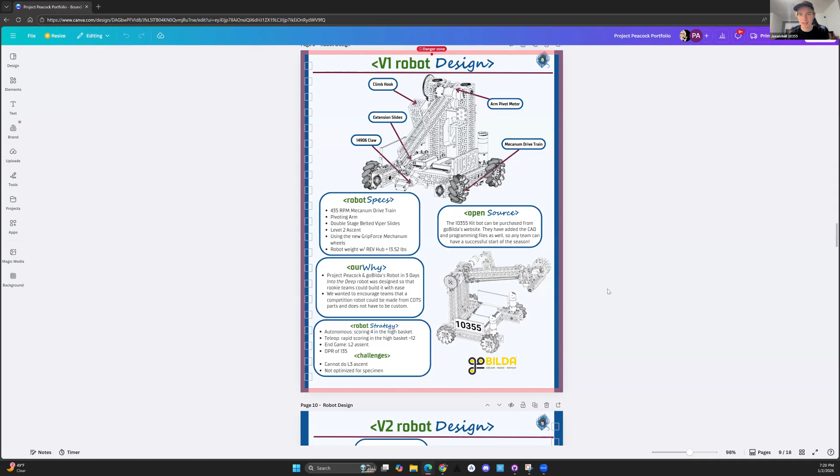One of the things the judges also like to see as part of the awards is what lessons you've learned and how you've thought about improving, and then how you decide to implement that. We can see that as we go into the V2 design, that we took a lot of what we learned and made it to where we didn't have to worry about that, and made it better.

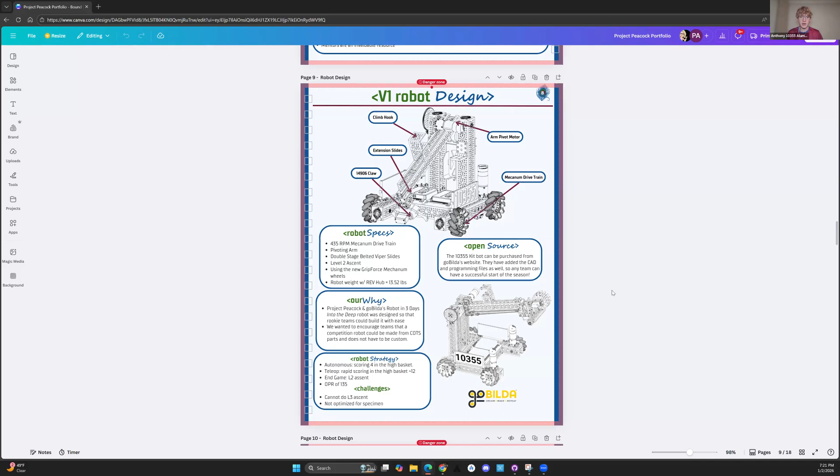So here's our overview page for V2. We really tried to highlight all the improvements from V1, things we learned from the past robot that we applied to this one. For example, we added level 2 hang and increased the specimen ability.

Just highlighting the important things, but keeping it nice and concise. Here, all we did was put bullet points — you don't have to do much detail. Just highlight the most important things that go along with your game strategy, and then you're fine.

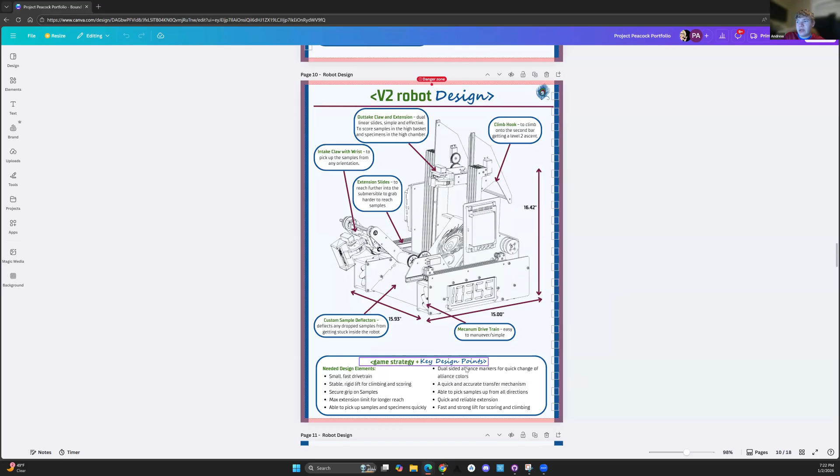Your game strategy and key design points — we made our robot based off of our strategy, and that strategy drives our design process to manufacture and create a robot that fits that strategy, right?

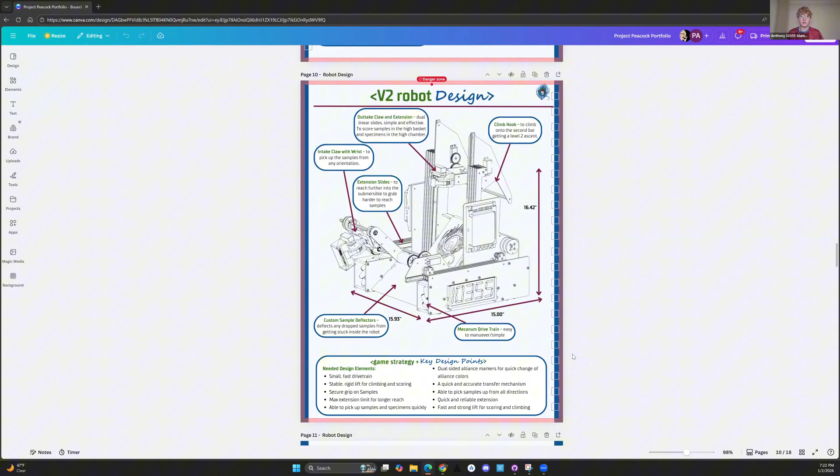One of the things also is you don't want to explain everything in the portfolio, because then the judges have no room to ask questions. This gives them enough detail to know what you're talking about, but still gives you as many opportunities to be asked questions as possible.

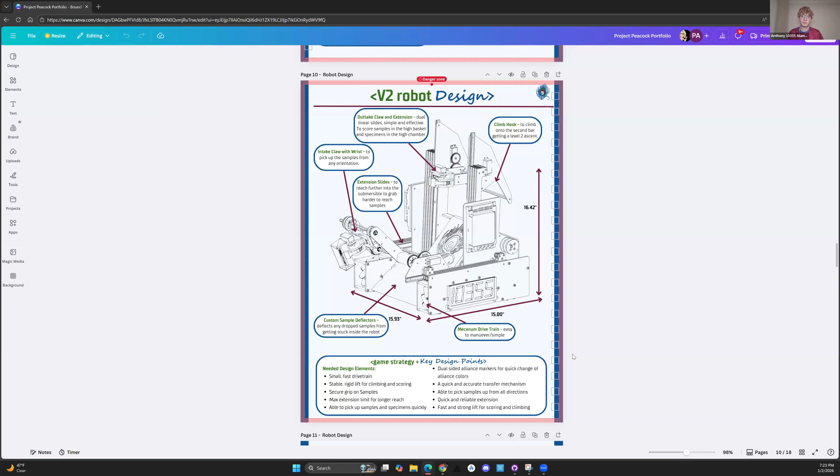So for our chassis design, we used the iLight drivetrain simulator to simulate our drivetrain performance, which is big for Think — math is big for that. So we make sure to include all of our motor calculations, then explain the drivetrain mechanism, pinpoint, all that stuff.

Includes lessons learned from the previous robot. We pretty much have a lessons learned section on every page, except for the first few pages, but it's on most of our technical pages. We always show that we think all of our designs can be improved, and they're not always perfect, so we can always be improving them.

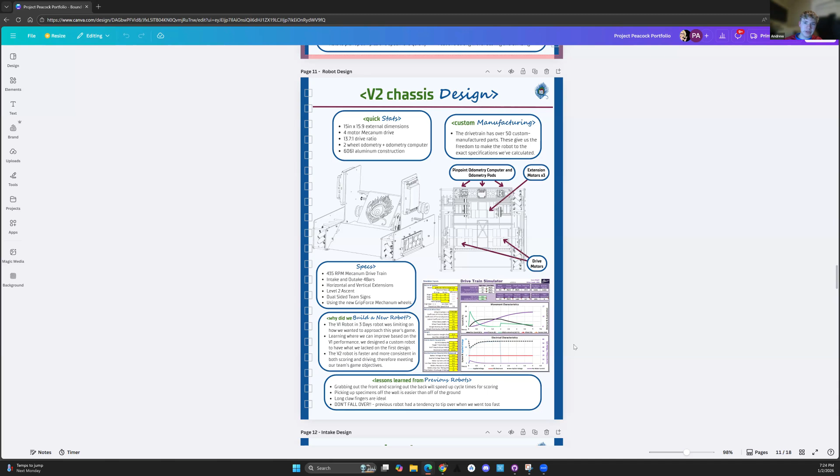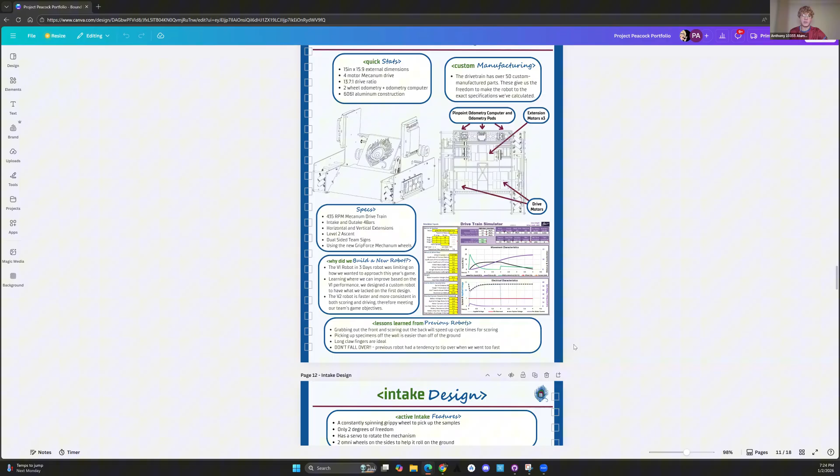Showing what we can do better, the judges like. Being able to show that we reflected on the performances we had and improved from there is something you guys can take into this season as well. It really shows them that you didn't just build a robot and were done — that you went back and learned from what needed to be improved.

We can see that with the active to the passive design and why we did that. Being able to show that we do all this thoughtfully and have reasons behind it, we reflect on the pros and cons, and do the best from there.

So here for our intake page, we included the V1 intake and compared it with the V2. Something really important is to explain why you did things.

For example, here we went from active to a passive claw intake, and we explained that it would be easier to select individual samples out of the submersible. So just explain your design choices as much as you can.

And then as you can see, lessons learned again at the bottom of the page — that's always important to us in our thought process of things.

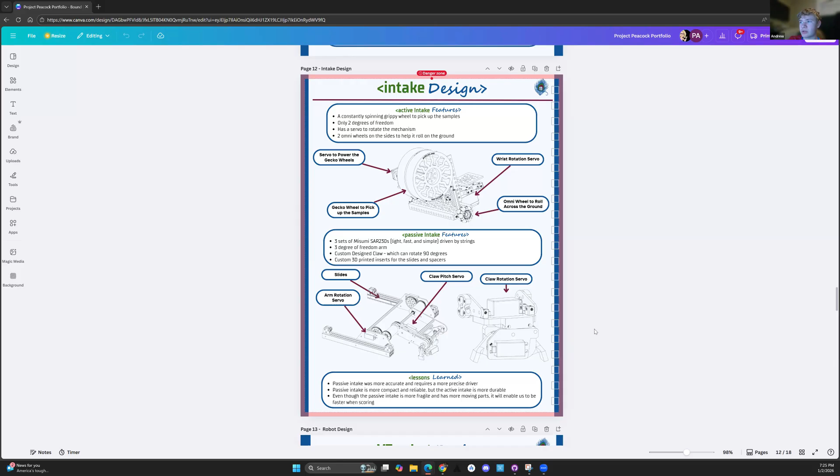All right, so then here for V3, the main thing is just adding the level 3. And then we also switched to carbon fiber to reduce weight for the level 3. And then we just go through and explain the changes, why we made them, pretty much the same as the last couple.

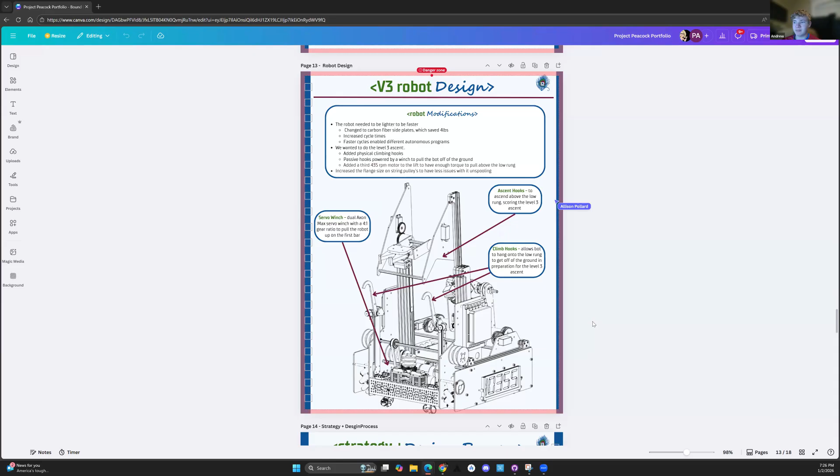But yeah, just again, showing them every step that we take and why we do it and what it includes really helps to emphasize what we do and why we do it. And so we can kind of see that with this page.

We wanted to score high in auto for both samples and specimen, and we had to make mechanisms to do both. We figured out it would be easier if the mechanisms were the same so we weren't having to worry about multiple different mechanisms.

So we did a passive transfer so we can grab and score on different sides and have faster cycle times. One of the things we had to play with and figure out was how we actually grabbed the sample from the robot, because sometimes getting the grabbing perfect wasn't the easiest.

And then obviously we went into our total points and our ideal match if we were doing a solo, so we could figure out how to do that. And then obviously the math for the thing with the lift pulleys, we had a lot of issues getting the level 3, but being able to figure that out and make that work was something we were really proud of.

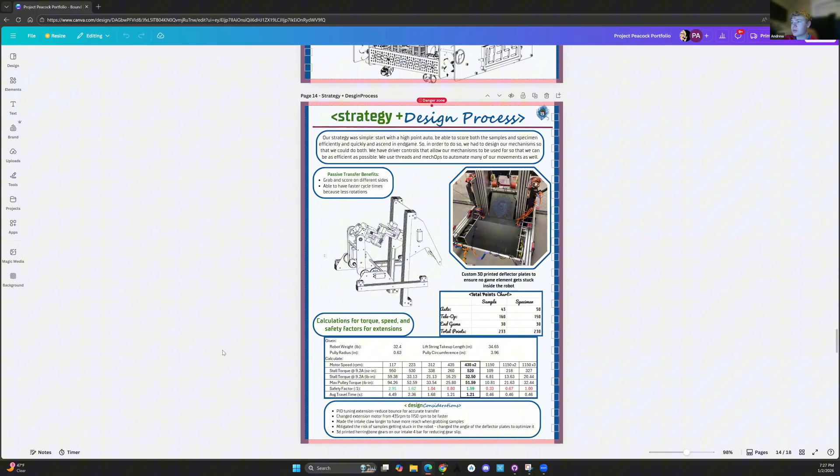Andrew and Jackson, do you guys have any thoughts or comments on it? No, you hit everything. So going into auto, yeah, we use Roadrunner and the pinpoint.

We talk a lot about this. This is probably one of our wordier pages, but we explain why we do Roadrunner, why we didn't do Pedro Pathing that year, how we use the four bar odometry pods and the pinpoint, and how we were fortunate enough to be able to test those.

We then go into our autonomous routine at the bottom and on the right side about our pathing, and we have the arrow matching the color in the box, so you can see, on the specimen, the green arrows are for splining and sweeping the samples into the human player station back and forth. So it really allows for the color code so judges can see that.

And obviously, again, we have lessons learned at the bottom, and there's a lot of different things we learned about how to make these autonomous programs and how to go from there.

So Andrew, Jackson, you hit everything. One thing, like color coding it to match the different pathing is also another neat idea, just to help the judges.

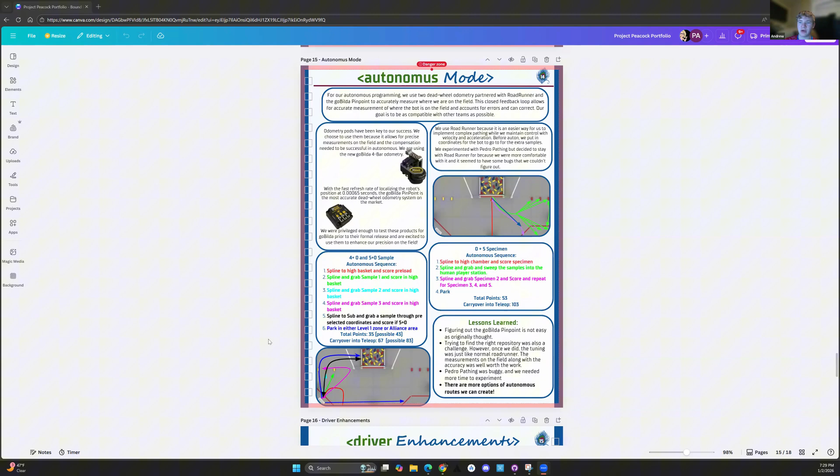Because some of the judges don't know the game very much, and so being able to somewhat dumb it down a little bit, make it easy for them to understand, and make it clear, is also very helpful.

And also bolding things makes it stand out to people. It's like, hey, this is important. Those kinds of things always help show something.

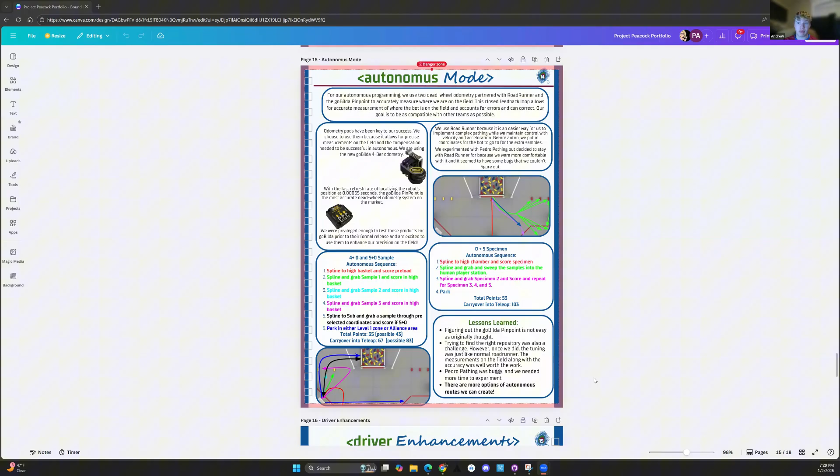Yeah, and then our last page is our driver enhancements. We took what we've learned over the years: less buttons, better. And if we can automate mechanisms, let's do it to help it be more successful.

So we had a lot of toggle controls. Things like opening the claw were the same button, deploying the intake was the same button. So really trying to help optimize speed and automating mechanisms.

So for example, after we would grab a sample, the entire time for when the intake would be brought in to actually transfer the sample was all automated. All the driver had to do was push a singular button. That was really beneficial because it doesn't have that many buttons.

But it was really easy because the drivers would know if they were running specimen or sample in the match, and so they could be in sync because they would know, okay, I'm touching the specimen, and I grabbed it, driver two needs to lift up. I touch the submersible, driver two needs to go down.

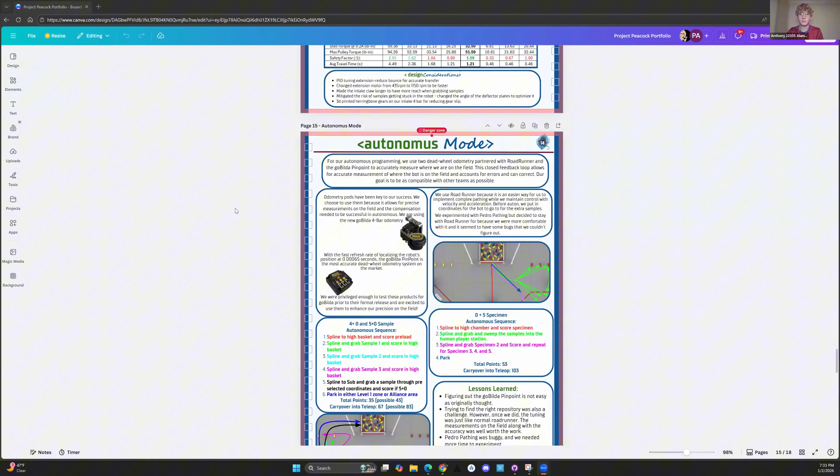Okay, if there are no questions, I guess we can continue with Turbo V8.

All right, can you see the slideshow? Yes. All right, Ethan, you want to go ahead? Oh yeah, so

We're presenting Pure Pursuit and Inverse Kinematics.

Okay, so Turbo V8 is a community team based in Pleasanton, California. Our team started in 2018. We have a team of 80 high school students.

So today we're presenting Pure Pursuit, Inverse Kinematics, and both of these algorithms. The problem is we want to move autonomously in a curved path, so we can use max power the entire duration, and then it autocorrects if we deviate from the actual path.

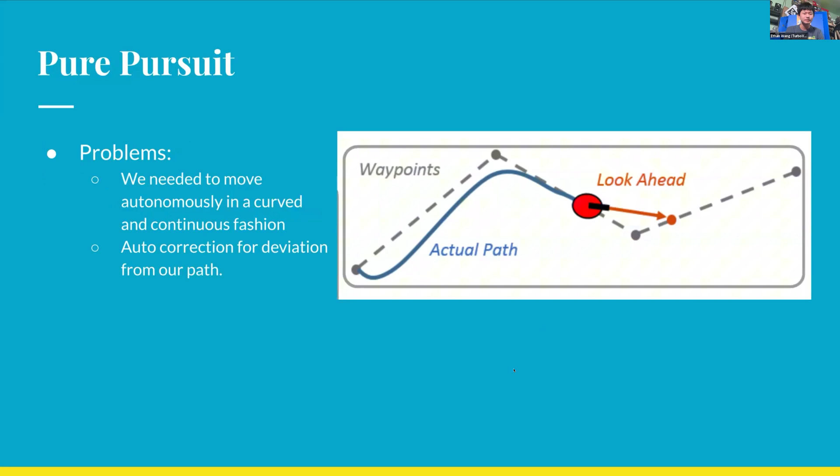So we have a Pure Pursuit algorithm, which is also used in games like Mario Kart. It's smooth and curved, accurate movements. It always looks ahead of where it actually goes, and then it converges onto the path if it's off.

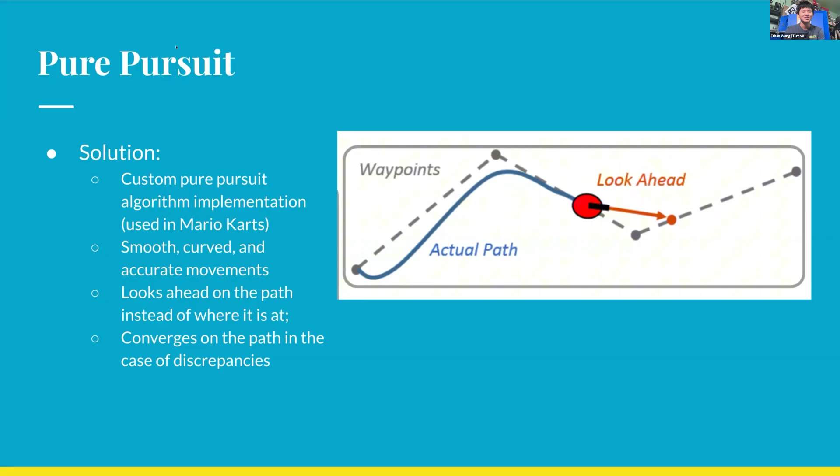Last year, the Into the Deep game was very particular on having a great transfer mechanism, and so in order to account for misalignments during robot motion, we had to compensate our arm and wrist position, basically our outtake deposit mechanism, to account for the slight shift in position of our intake while the robot was moving.

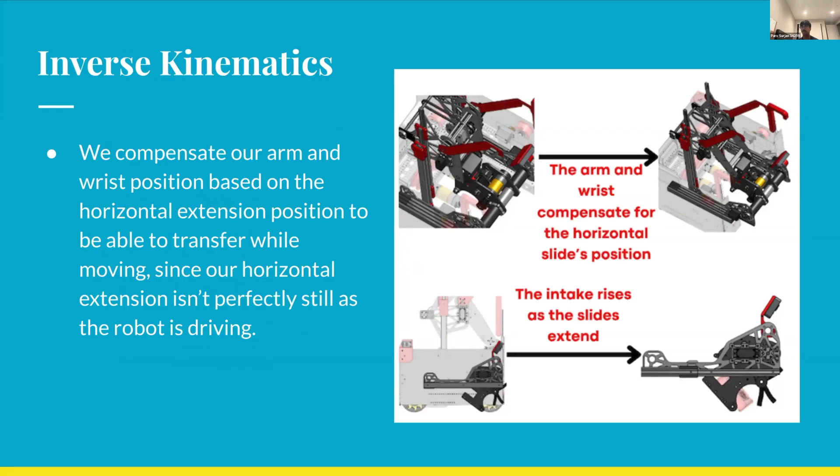Another thing was we had to raise the height of our intake as the horizontal extension was moving, because our slides drooped down by gravity. This really assured that we had a standard height of intaking samples from the submersible and we weren't going down too far, and it was fairly constant in that way.

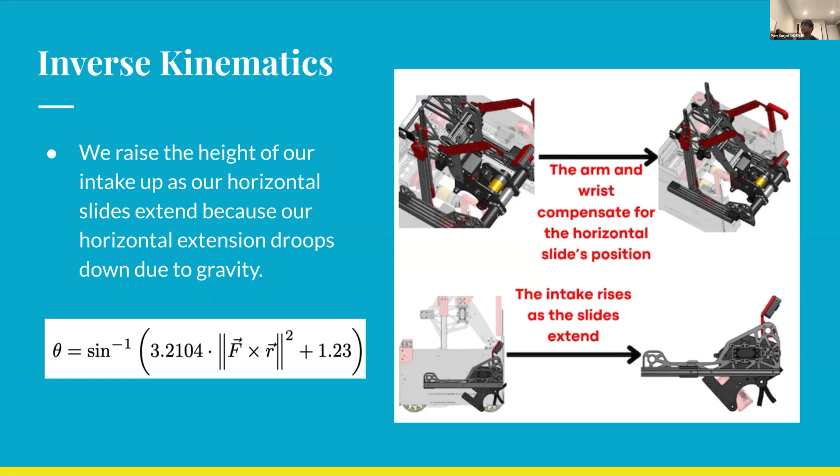One more thing we used inverse kinematics for was to account for the sag of the actual intake mechanism itself, feeding back into the previous thing. Because the slides would sag, we had to account for it, so we used the sinusoidal relationship with the height, using the weight of the intake mechanism itself and the torque produced by gravity to calculate how much we had to extend upwards.

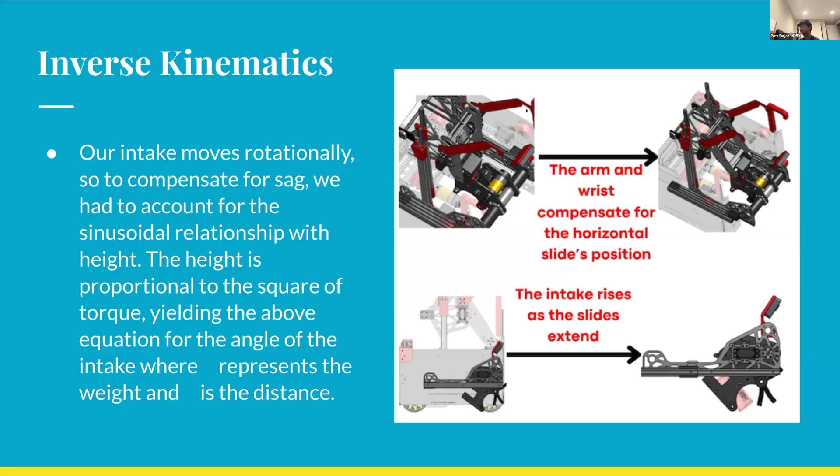By doing this, we were trying to look for and nitpick every small thing that could make our robot more consistent. These weren't the major features of our robot, but they're really what made it more efficient and helped it become what it was. They weren't changing the boundaries of what we could do, but they helped us achieve more, and it really brought us consistency, redundancy, and efficiency.

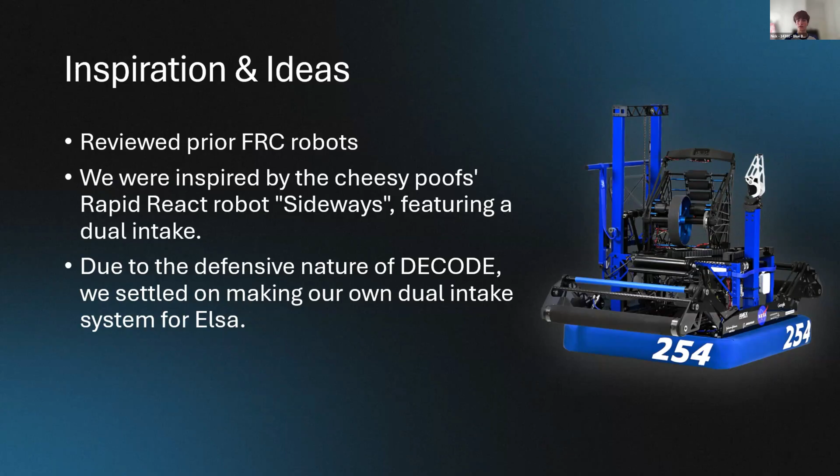Eli, do you want to talk about how our intakes are powered? Sure, so we use two bare motors, one for each side, one for each intake, on a bevel gear, to power the roller. The reason we have two motors, not one to power both, is because we don't always want to power both at the same time. We want to be able to independently power them, so if we wanted to just intake one side, we can do that. They're running at pretty fast RPM, so when we touch the artifacts, they just get sucked straight in.

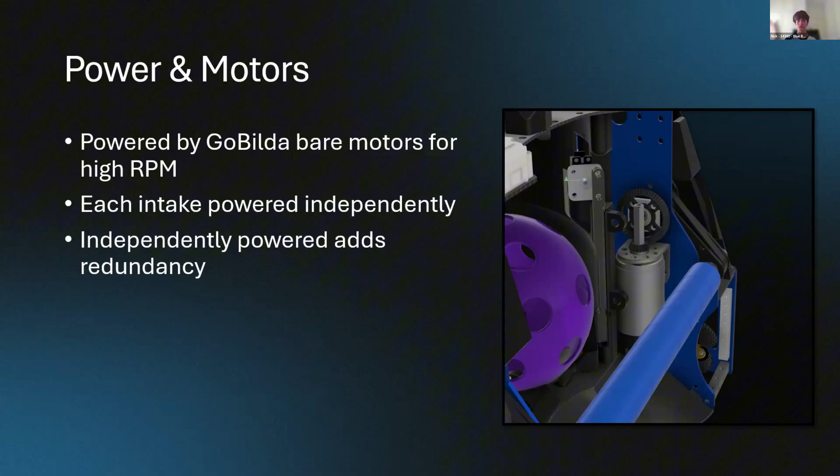Nick, do you want to add anything else? Yeah, so each side spins at about 2000 RPM to allow for really fast intaking. The power is transferred from the bare motors through axon bevel gears, which get the ratio from 6,000 down to about 2,000, and then there's a small speed up on the little pulleys we've got on one side to spin the actual sushi rollers.

The sushi rollers are a product from AndyMark, about an inch in diameter, and they're really good. We tested a bunch of rollers, from gecko wheels to things like polycarbonate with cat tongue tape around it, and we found that the sushi rollers work the best — they're really simple but have a really reliable grip on artifacts.

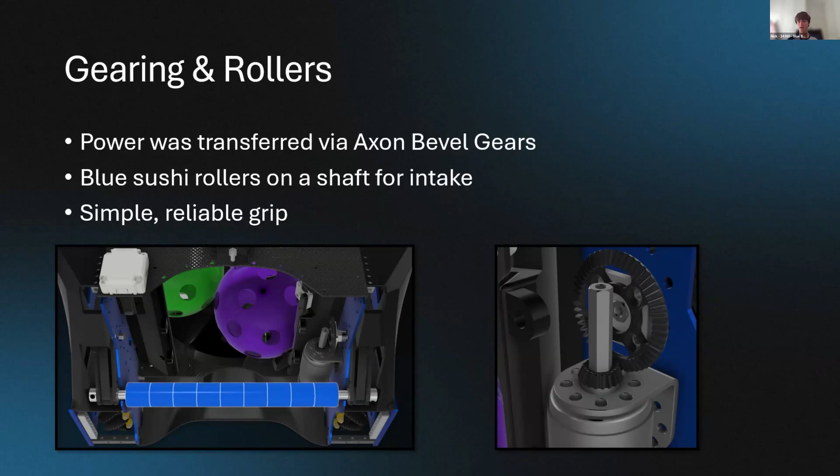Rylan, do you want to talk about how our intakes are compliant? Yeah, so basically our intakes, it's not power that decides the angle of the intake. We actually just free it, and we add some compliance with rubber bands that attach the bottom of the intake arms to the robot, so they kind of snap back after an intake.

After an artifact has gone through the intake, we have bungee cords stretching across the transfer so that it acts like a one-way gate, so the artifacts don't bounce out after they've gone through the intake.

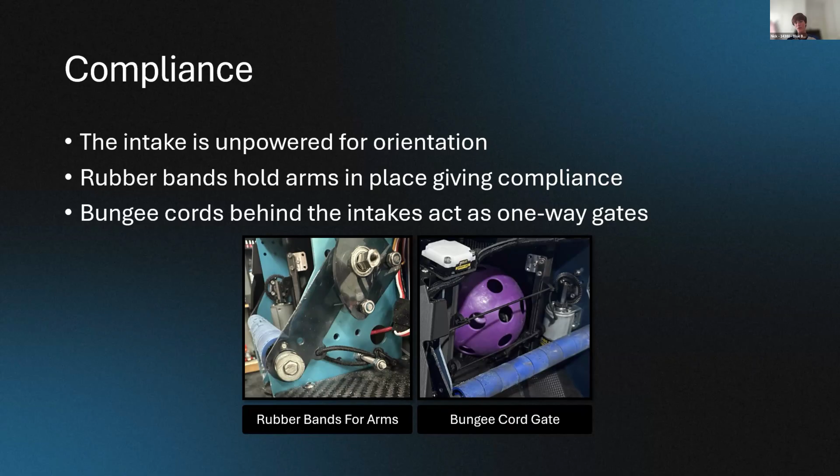Basically what happens is, because our rollers are hard, they spin and go around the artifact and suck it in behind it, and the little rubber bands snap down to keep it down because of gravity. Then the bungee cord lets the artifacts roll through it when getting power from the intake, but they can't go back out, so when our kickers are sorting the artifacts, they can't roll out one side. We found that to be really effective.

Rylan, do you want to talk about the intake ramp as well? Sure, so our intake ramp is fully custom designed in Fusion 360. It has a profile that funnels the artifacts towards the center when they're being intaken. Not only do we have the intake ramp that's 3D printed, but we actually stick some cat tongue tape on it, which adds more friction, making it easier to intake artifacts.

It also connects to the bottom of the robot, the bottom plate of the robot, and the middle joining plate of the robot. So yeah.

Do you want to give a little extra on how they were designed? Yeah, so we used the loft tool, which basically profiles between two planes to make a really smooth and well-rounded design of the intake ramp.

Something to add about the design is the inner plate has a bit of a cutout that actually effectively widens the intake. You can see near both mecanum wheels at the front, there's a little shape cut out of it that effectively makes the intake larger, just because of the nature of the artifacts.

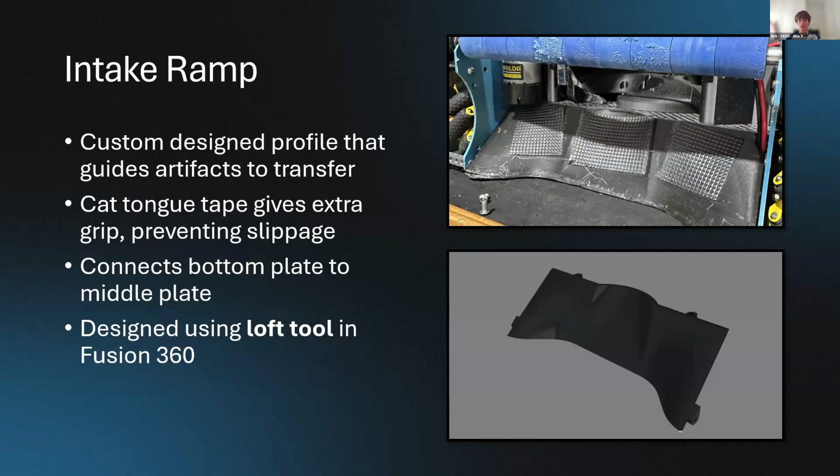So yeah, Eli, do you want to talk about what materials our intake is made out of? Yeah, sure. So for our intake, we 3D printed it using PLA filament. We use the Bambu Lab P1S.

The reason for 3D printing is it's great for this, since there's the profile that we have, it allows us to create those sort of profiles. Whereas with a CNC intake, you won't be able to achieve the same sort of shape. So that's why 3D printing really suits the intake.

So we use the PLA for the ramp, and then the little arms that the rollers sit on are made out of, I think, 3 mil polycarbonate, and they go up, so that holds it really rigid. The thing about polycarb is unlike carbon fiber, it's decently flexible, so it can absorb a lot of bumps and still remain quite durable, and it works really well for our design.

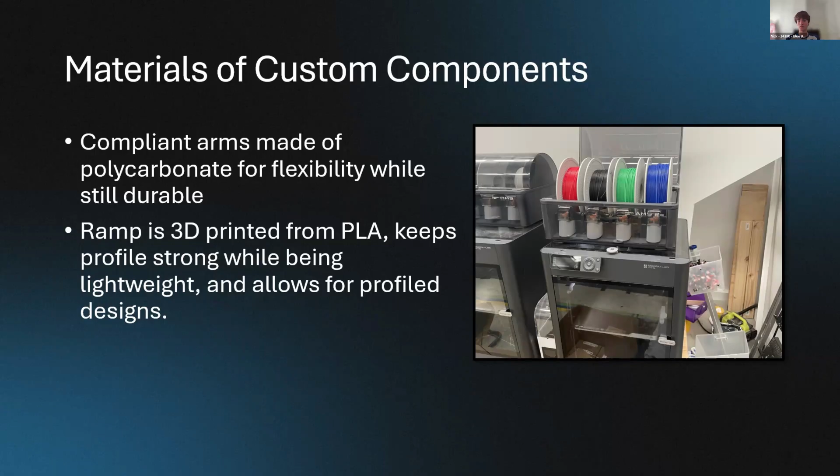Through our testing of our intakes through both of our competitions and a lot of time at the studio, we've looked at the pros and the cons. Let's go through the pros first. The pro is that it improves our cycle times.

Instead of having to spin the robot constantly to intake artifacts, we can rotate less and go forwards and backwards and get artifacts really quickly and efficiently, and this speeds up our cycle times.

Another pro is that we're quite hard to defend. So if a robot is on one side pushing our intake, trying to stop us from intaking, we can just drive backwards and use the other intake, and that works just as fine, and we get just as many artifacts just as quick.

It's because of how we've designed it with the compliant arms and the thin 1 inch sushi rollers, the sizing is really small. So we were able to have one on each side while still combining the width of just a regular intake that lots of other teams have.

However, all designs have their cons. One of the main cons of ours is that it requires 2 motors, one for each side. While you could, in theory, link them together with just one motor, that wouldn't be as redundant, and that's not what we needed for our design.

So we have to use 2 motors, which doesn't allow us to have a 2 motor launcher and a motor turret, or makes us either do an option or combination with servos. So that's quite a big con for us.